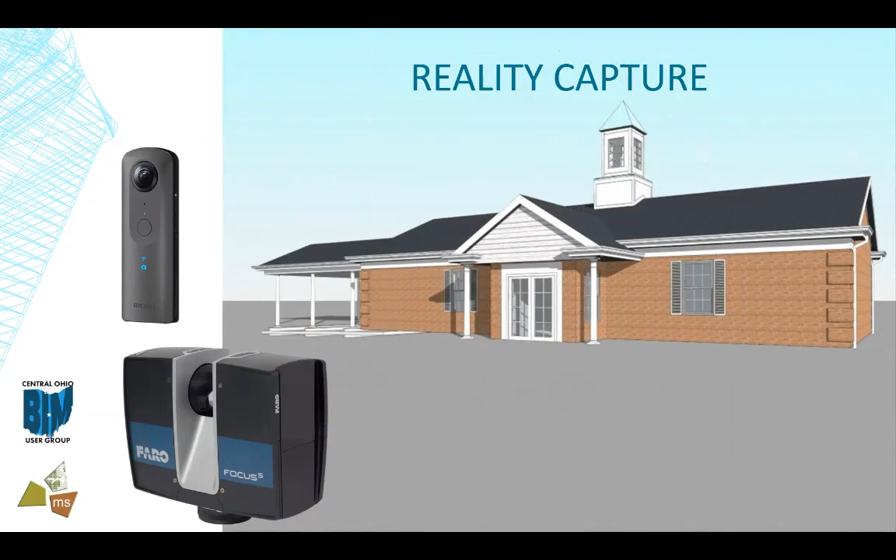So a couple of the ways we've been using this technology - one of the heavy components has been reality capture. We own a couple different means of doing this: we own a 360 camera, point and shoot, real easy, real simple. We own a couple 3D laser scanners, so we started collecting all that data. We figured there's got to be a way to view all this 3D data, so we spent some time focused on that. We got a drone, we fly the drone - same thing, point clouds, got to figure out a way to get all that data in there. Reality capture has been a big proponent for us in re-visualizing all the data we're collecting.

There's a whole bunch of 360 cameras out there. I know we own a Ricoh Theta, I don't remember the exact version, but they have a handful of them. They're very nice, real easy, point and shoot. Just pop it up in the air, and the image you see in the background here was taken from the camera itself.

The images can be viewed and posted on a website. I know their software lets you upload it, they have a cloud platform you can host things in if that's easy for you. It's real quick, real easy.

Those images can also be processed in a whole bunch of different software to let you view them in headsets, like Google Cardboard. It's easy, it's cheap. I think the cameras range in cost from a couple hundred dollars into maybe the $1,000 range, so they're at varying price points per quality too.

3D scanning. Is everybody here familiar with 3D scanning? A lot of good nods. Okay, I won't spend too much time on that since you already know what it is, which is good.

We do a lot of 3D scanning. We've been scanning for at least 7 years that I know about, so we have years worth of data that we reuse all the time. We want to get clients more familiar with their own data, so VR was a natural workflow for us to let people experience their spaces and their point clouds again in VR.

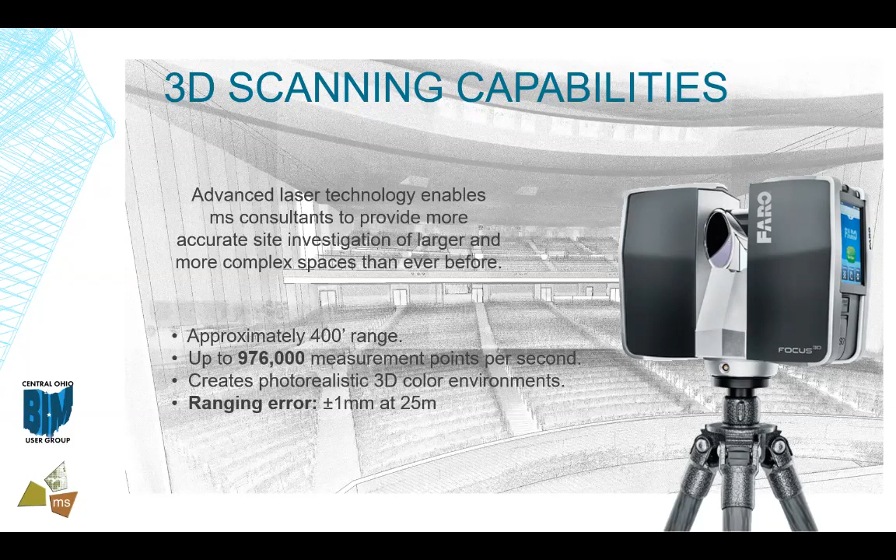These are the ones we ultimately spent the most time on and focused our workflows around. So we use Iris VR. They make 2 products, Prospect, which is their VR platform, and Scope, a mobile platform which runs on Android and iOS devices. It will allow you to upload 360 panoramas to view in Google Cardboard or on a mobile phone from anywhere. It's a nice, simplistic platform you can take with you anywhere. The Prospect application is one of the programs we'll jump into in a little bit.

Enscape is a rendering application that runs in Revit, SketchUp, and I believe Rhino as well. It's a very quick, real-time rendering application that produces really high-end results, and as soon as we saw it we said, yep, we're gonna keep doing that.

That one's good. The Autodesk 360 platform, like I said in the beginning, is one of the places we started. It's cloud-based, so you can upload Revit models, do static renderings, 360 panoramas, and output to Google Cardboard.

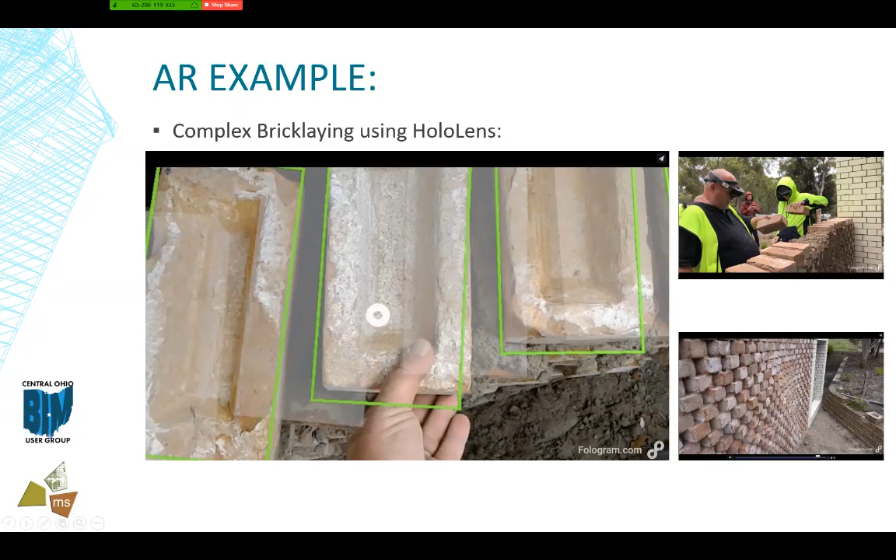Then Hyperform—we saw a video of this where it's more of a VR desktop and video conferencing type of application. The person seated behind the camera essentially has a wall of models and notes and calendar items, and he receives an invite from someone standing in front of him for a video conference to talk about this model. He places it virtually onto the desktop.

They add some trees live, and it populates with the trees. Then he actually creates it as a kind of virtual environment, and it populates all the buildings in the background—a really neat demonstration of that, and of people thinking about where this technology can go next as it continues to advance.

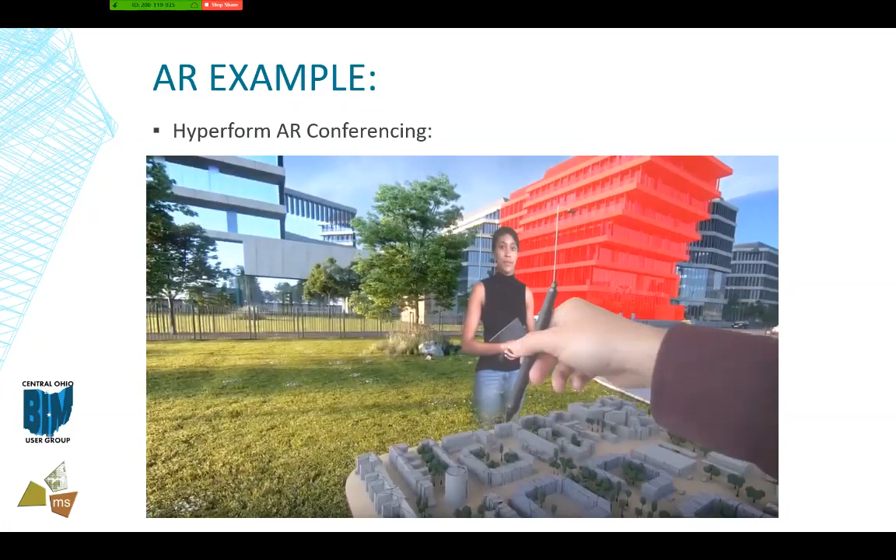That's pretty much the PowerPoint portion of our presentation. Does anybody have any questions?

Okay, let's get to some fun stuff.

We'll start by taking a look at our point clouds. We use the Scene platform. This was a water treatment plant that was scanned a while back—I think it was about 18 scans.

So we're taking a look now at our VR platform with regards to the point clouds. We're going to take a look at Scene and visualize the data that was captured through 18 point cloud scans.

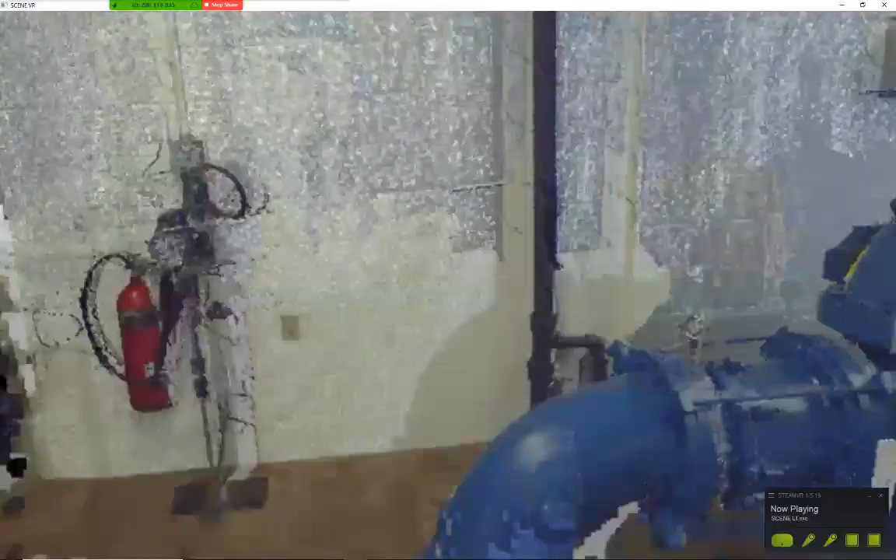So this is a laser scan of a Morse Road pump station for City of Columbus. They scanned the existing conditions, replaced some pumps, and added some new piping. But the M in building information modeling stands for modeling, so we need to create the existing conditions before we can design the proposed conditions.

This allows us to capture very quickly literally millions of points of information, all with an X, Y, and Z coordinate. In the software, we can measure between each of the points, we can walk around. It's both digital information as far as those X, Y, Z points, but also visual. Instead of pictures, it's basically a living environment that you can occupy and examine. So it's not static.

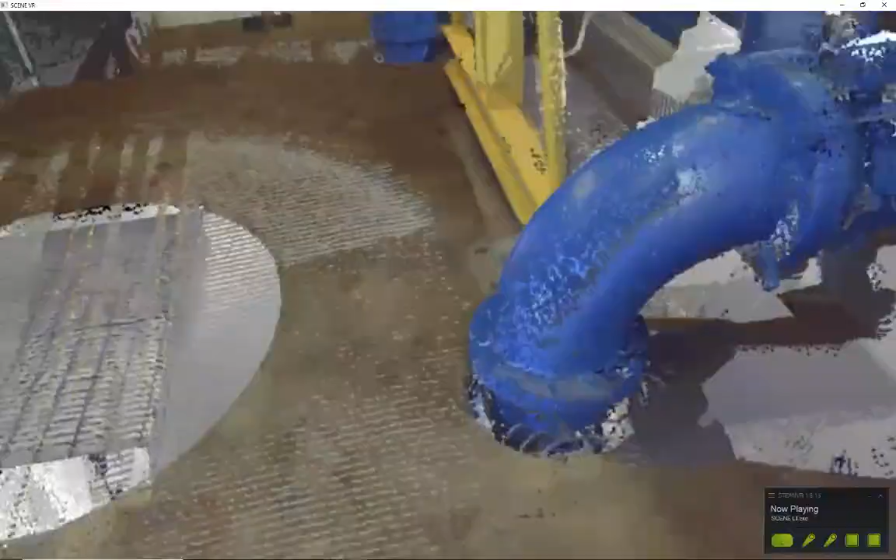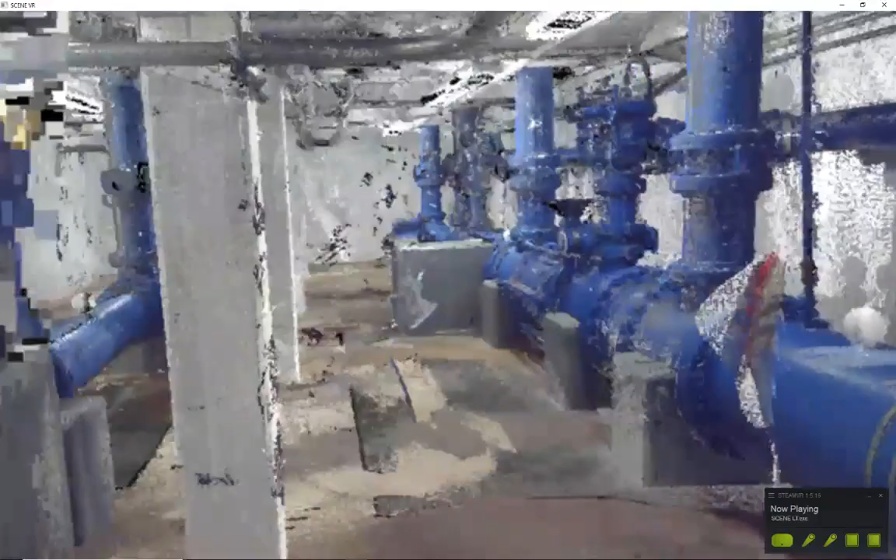I think they said this one was somewhere in the neighborhood of about 20 scans. Typically you can do roughly 400 square feet per scan, but that varies depending on the complexity.

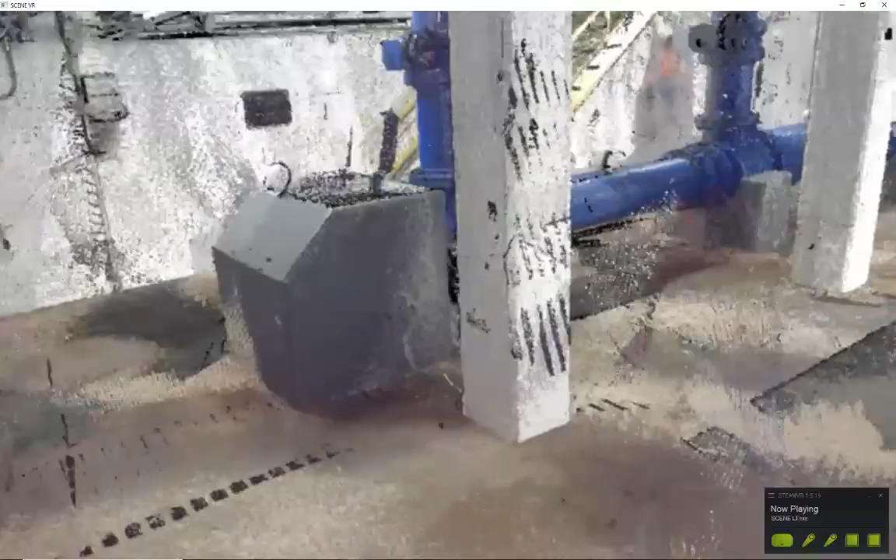If you look at any one spot, there might be kind of a white area behind it. The laser scans are line of sight, so anything obstructed, the laser points can't get behind, and that's basically blank information, almost like a shadow. So if we needed information that was missing from one scan, we would move the scanner to a new location and get the items from that side.

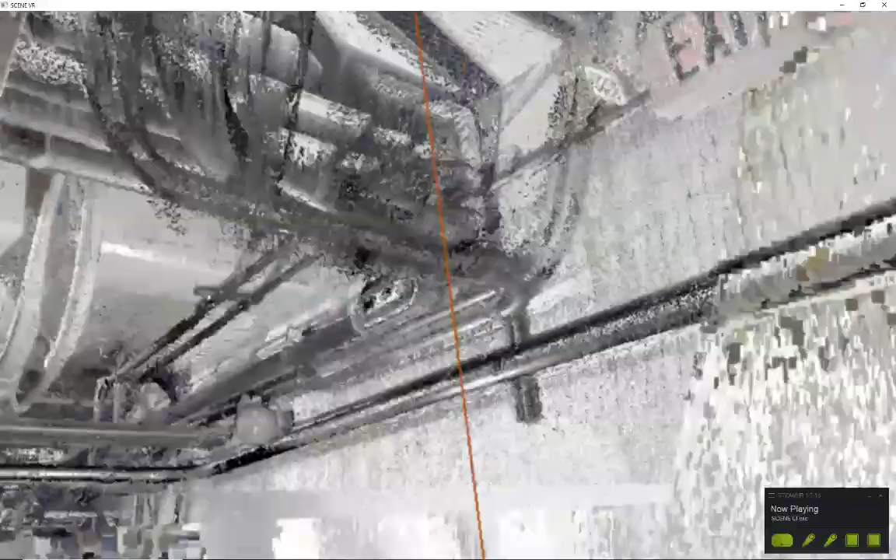You may be able to see basically 6-inch spherical targets, which are just plastic lamp globes we got at Home Depot or Lowe's. There are also paper targets with little black and white squares, 4 squares, that are easier to tape up and transport through an airport as we go from place to place, a little bit more portable. When the software stitches everything together, it's triangulating between all those scan locations or targets, and it becomes something very accurate.

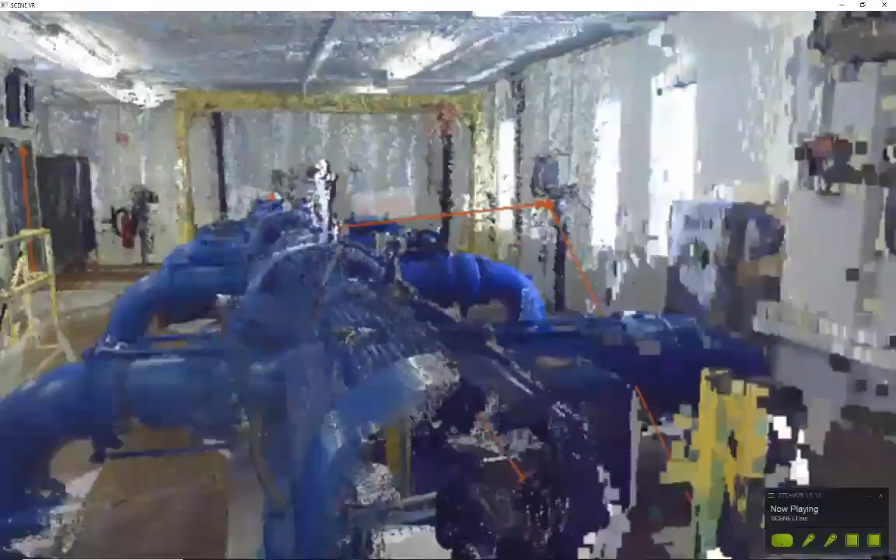This does almost 1 million scans per second, 1 million points per second. Generally, the scans take anywhere from 3 to 6 minutes depending if you're black and white or color. In black and white, it will operate in total darkness, so if you had a ceiling area you had access to but couldn't illuminate everything, it would capture that information above the ceiling.

And now what you have essentially is a live rendered view of that, so this is all on the fly. It's a live link to the model, so I can go back into Revit, change a material, add content, move something, and it will reprocess it and render it immediately. There's no lag, it's back and forth. So this is essentially a live rendered view.

What's nice about Enscape compared to Lumion, they're fairly equivalent rendering wise, but what we found is Lumion has much better strengths, particularly for the exterior and site tools, vegetation. It's got a more complete library, although Enscape is working on that. But interior wise, it doesn't recognize lights from Revit, so you have to either use proxies or manually place the lights similar to Photoshop where you would add lights there. So it's not the fastest process.

The question was how families are grouped in Enscape, and essentially it's whatever you group them in and however you organize them in Revit. So the Revit families, in this case, a lot of the extra content would never be brought into the construction documents because the building department doesn't care about a piece of furniture or a finish. So basically we split the model off and added the extra content into that only. It's not part of the regular set, but they're families we could add into other projects anytime we wanted. However you set it up in Revit is however it's represented in Enscape.

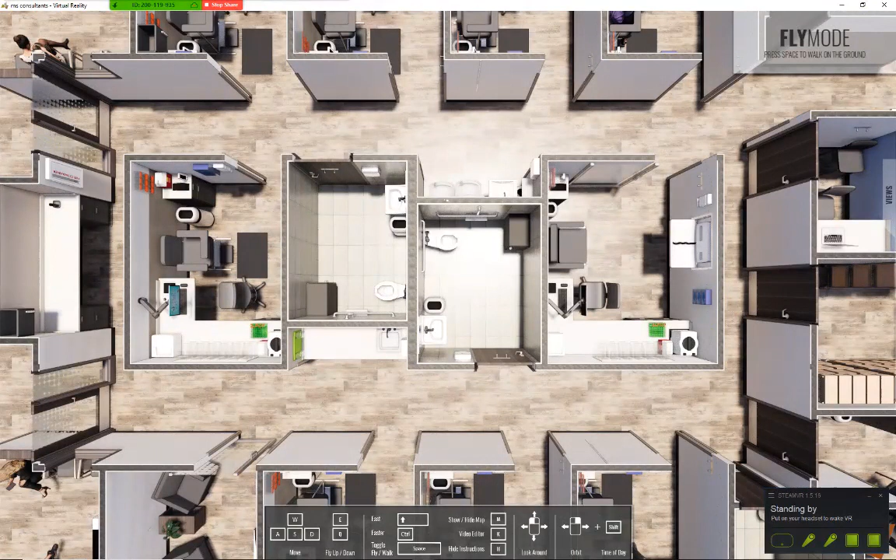So here you can see that it's basically fully rendered. There's a cut plane in the view settings from Revit that basically tells it to cut everything and hide everything above that cut plane. So you can start to see an overall picture of the space with the finishes and decals. Let me go back and switch it back to the other view.

What was stopping it before, I was trying to force it into a forced two-point perspective, which doesn't work in the bird's eye. You just basically have a single vanishing point.

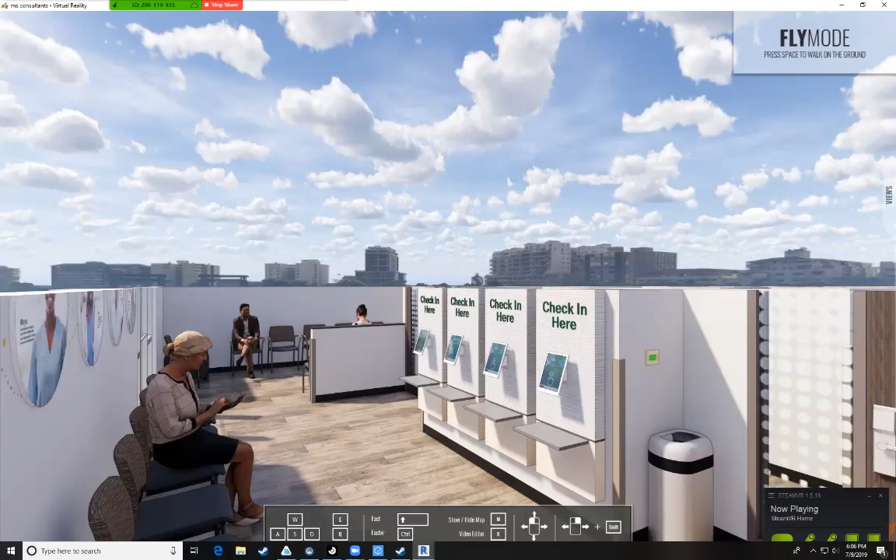You'll see I have like a waiting room alternate. Basically, they wanted a carpet option as well. And let's see, we added some people after the views were set up, so they might not be registered within a certain view.

What we were trying to do was, Enscape has about 50 people or so in different poses. We wanted to start populating that. We didn't do that with the official version for the client, but we just wanted to add some visual interest. Once you actually put the headset on and start to experience the scale, it really is a noticeable difference between what you see in 2D projected on the wall versus what you see with the goggles. The spaces are much more intimate in the fully immersive environment.

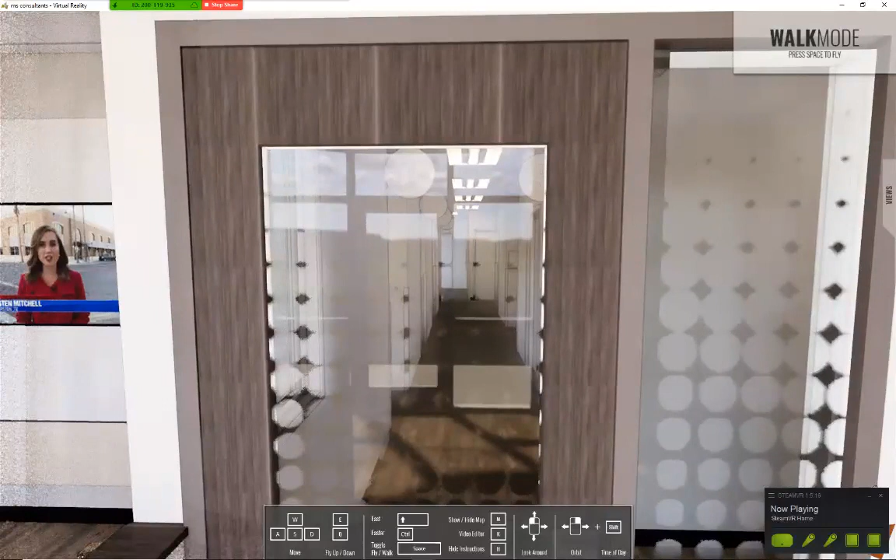So the question for the recording is whether it's more valuable to have an interactive meeting with the client where you can change things on the fly, render it on the fly, and not have to wait for results to be presented and sent, by which point you're past your meeting. So yes, there is a very strong value.

We've had meetings with this client where we showed it to them. It's very helpful. These are not people that are skilled technically on the architecture, engineering, or design side. So for them to be able to understand better the things we're showing them and communicate that with staff through the use of these printouts that they can look at, it's really done a good job of building up the excitement for them to roll stuff out.

Their preferred method was PowerPoint slides. The person was very familiar with PowerPoint, so he'd just put these presentations together with static images, and the quality was good for their part, but lacking in terms of communicating everything they needed to. So we stepped the game up for them, and they're very excited by that.

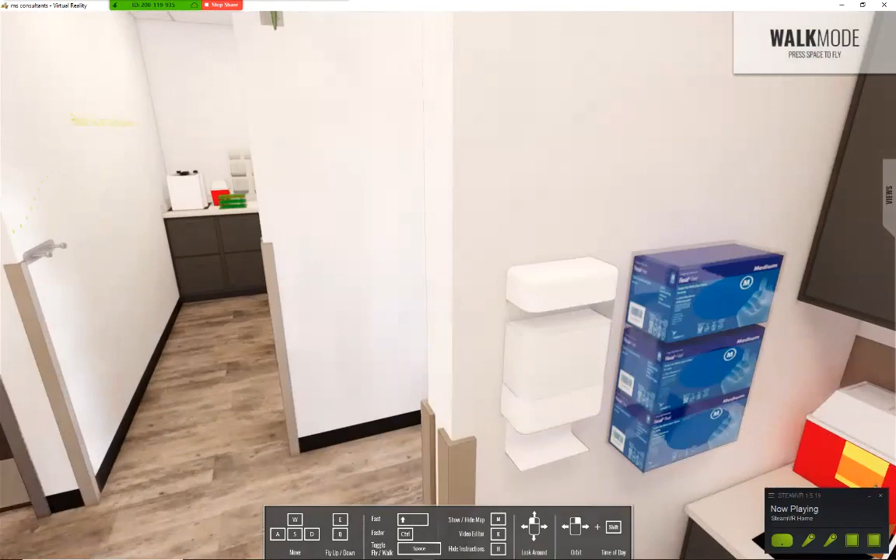We actually had a client come in, and they were very interested in seeing what a view window through an electrical room into their treatment plant looked like. On paper, there's really no way to get a perspective of what you're actually going to get and if that window's in the right spot. They were very adamant that the window was important, which it is.

So coming in and putting the headset on and standing in front of that window, in 10 seconds they're like, good to go, after we moved it a foot. There's no real way to see that until you see it at one-to-one scale. And the one-to-one scale has been incredibly powerful for us.

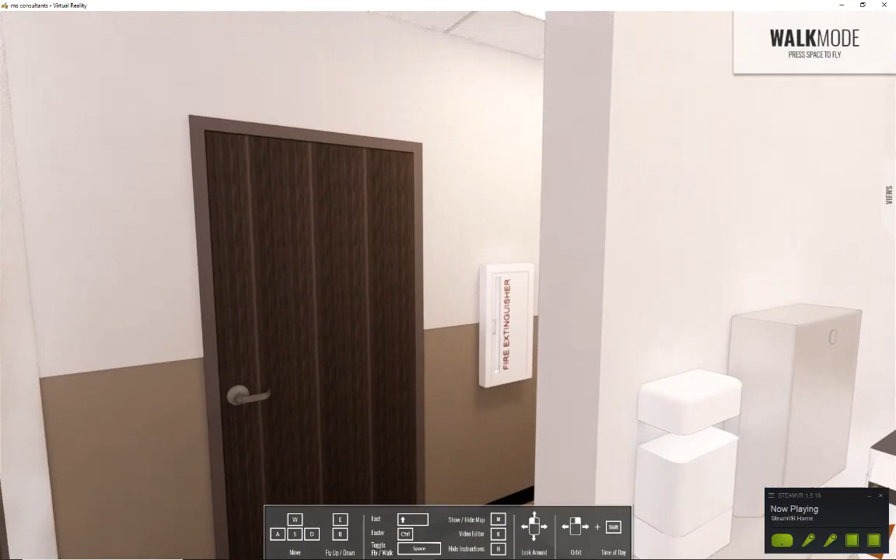With the client for the facility you see here, they actually came in and we had them sit physically in a chair, and then they positioned themselves at one of the blood draw chairs so they could get the perspective from both the client, then as a tech, and then as somebody else entering the space, to get a feel for how these spaces are going to operate.

And for them, that was super impactful. They were really excited to be able to have that experience, because otherwise you have to wait till it's built. So now they're way ahead of it.

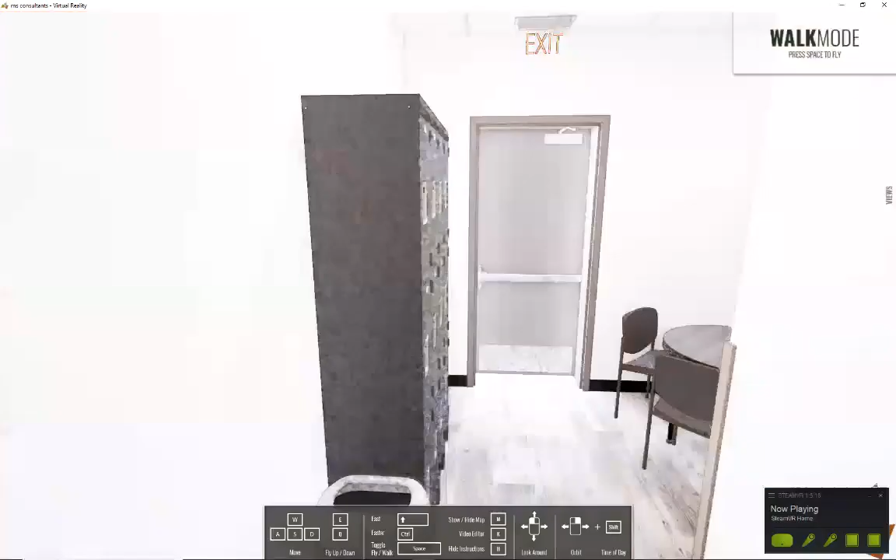And you can change things like materials on the fly. So if they're not comfortable with the floor or wall paint or things like that, you can change those on the fly, and in a couple of minutes get your palette lined up. You would change it in Revit. So when I talked about moving the window 1 foot, we moved the window 1 foot and all the CDs were done, and they were visualizing it in VR all at the same time.

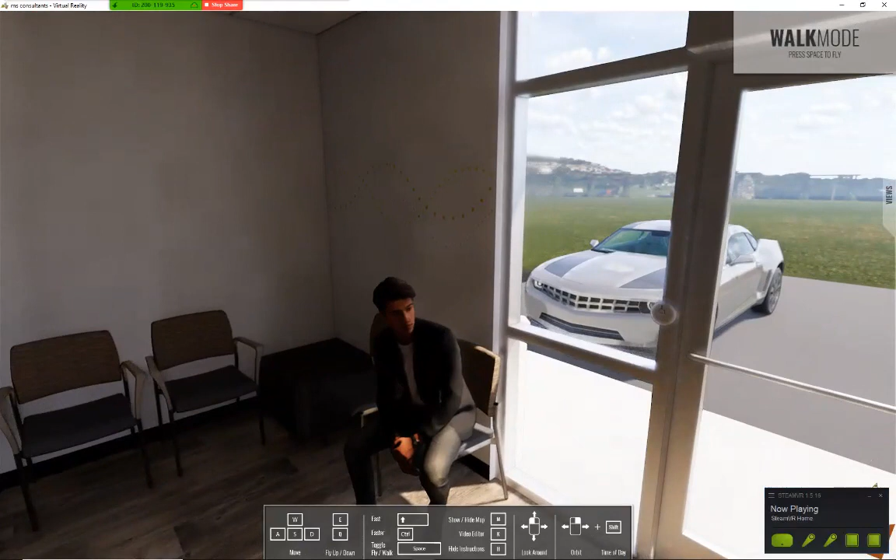Yes, what we had hoped would work would be to create views. As you navigate through, it obviously works better on 2 screens, but we're trying to capture everything on one. So there's overlap there. So the question was, how do you track changes between versions when you make edits?

It's a difficulty and a challenge. Even to the point of when you get a view that you like in Enscape, there's a button to create a view from that. But in the Revit version of it, it doesn't quite look the same, and so you have to adjust it again. And then it's very difficult, I've found, to get the same exact view from iteration to iteration.

So ideally what you would do is create renderings in a dated folder and then make the changes, and you'd have to do new renderings and try to match it as best as possible. I haven't yet been able to replicate an exact view because the difference between the Revit version and the Enscape version were slightly different.

So it creates them from Enscape, but saves them into Revit, and then Revit changes them slightly. So maybe it's a matter of setting up the window properly so that it matches more of your display window in Enscape, if that makes sense. I haven't examined it too closely yet.

With Iris VR, you gain a tremendous amount of tools, which gains functionality and lets us do things with VR that we weren't doing before, as opposed to just viewing a space, which is really cool, but we want to be able to use this stuff. So with Iris VR, we're able to do room scale models. We can scale them up and down. I'll put the headset on and demonstrate some of these things.

These tools let us have clients come in and do real-time markups, make notes, all in the VR space, take measurements, do sun and shadow studies. Probably missing some, but when I put the headset on, I'll try and walk through them all. The caveat is it's at a slightly lower visual quality, so it sacrifices the visual aspect in favor of a lot of better tool sets.

The same way that Revit is kind of a decathlete - there are faster sprinters and farther javelin throwers, but Revit does many things very well - Iris VR has certain advantages compared to Enscape, and Enscape has its own advantages and disadvantages. So there are trade-offs. There's not any one perfect solution yet.

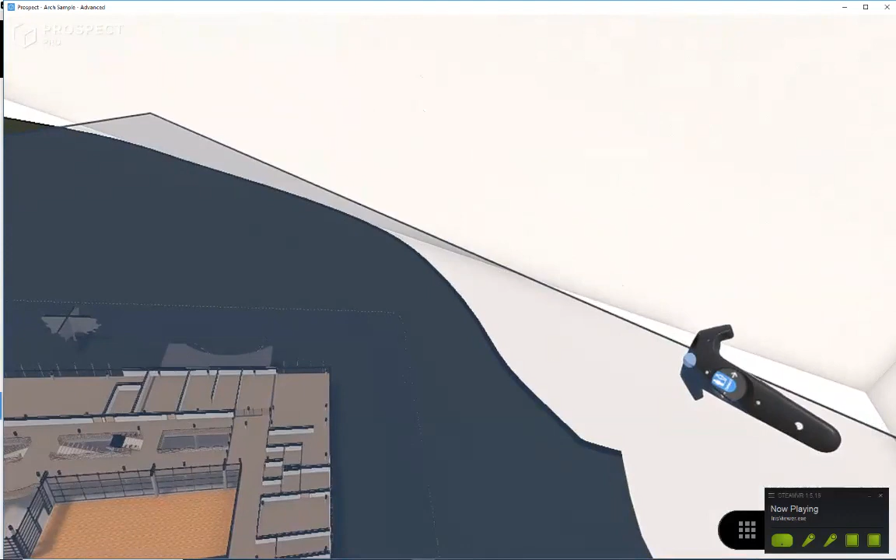They're starting to play well with each other better, and these developments are something we've been monitoring. I know Iris VR mentioned that they were going to be adding live lights from Revit in their workflow at a future release. And there, Dom is showing a live section.

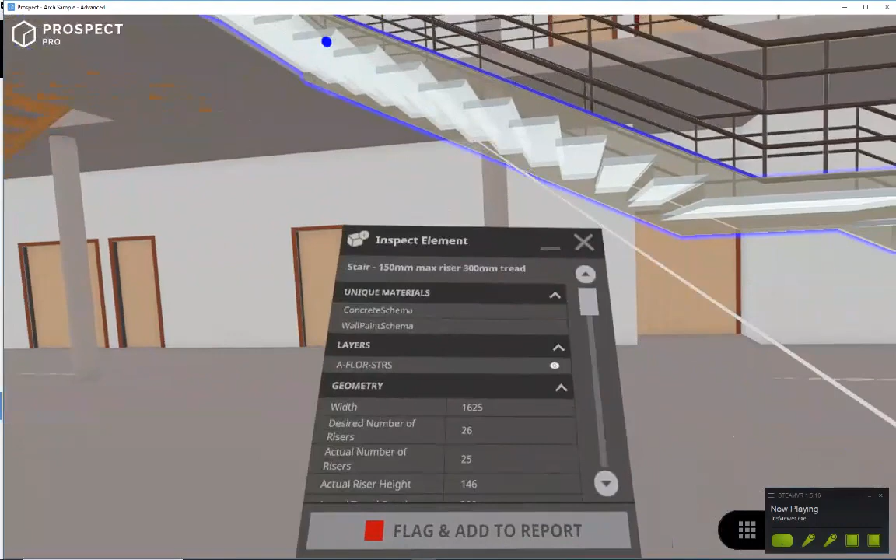Inspect element - you gather all the BIM data. It's coming directly out of Revit, translating all of that information along with it. Select any object, gather its properties directly out of the Revit model.

There's a very feature-rich set of markup tools. We can do callouts, calling out across the space. We can do brush with a projected surface, so I can go graffiti on the wall. Or my personal favorite is the handheld brush, which lets you mark up in 3D space.

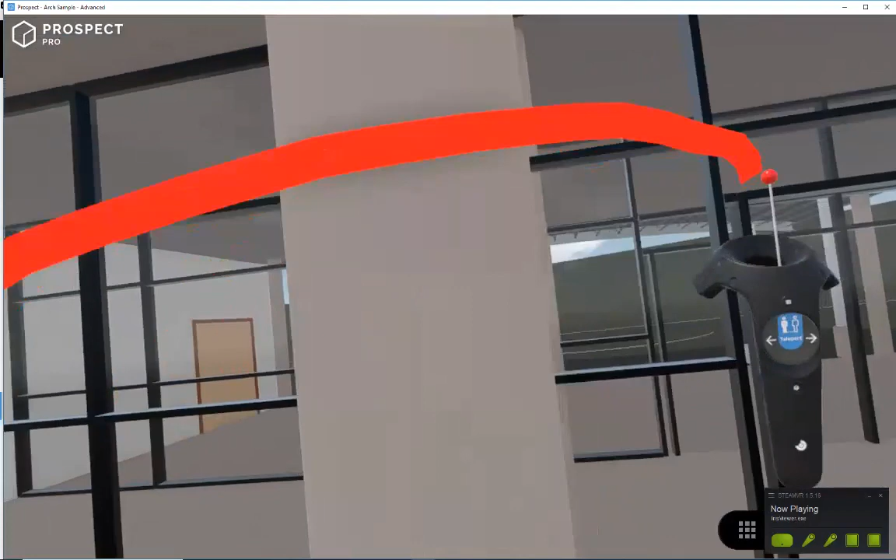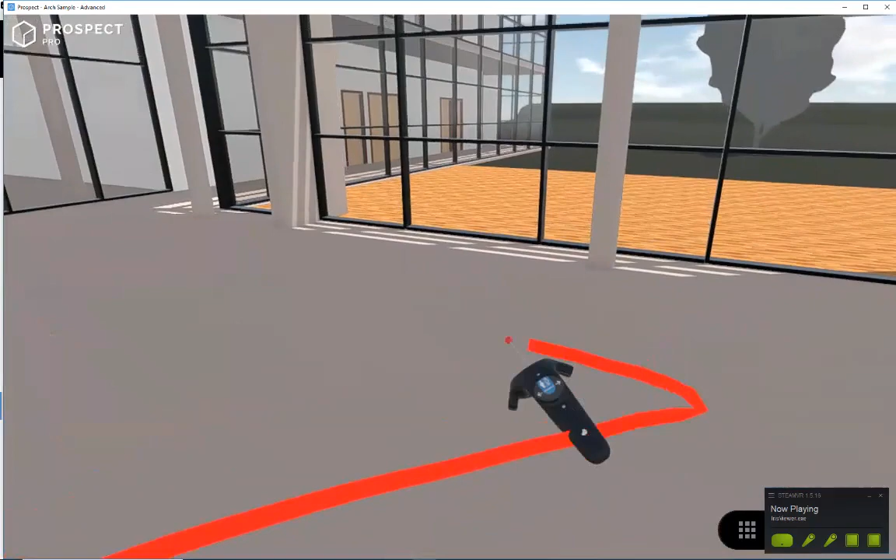So I know you asked the question about capturing all of this content that is done in VR. One thing this program does that's really nice is allow you to take screenshots while you're in the space. Screen grab that, and you can see adding the images and comments to a report to be exported as a PDF for use outside of the VR.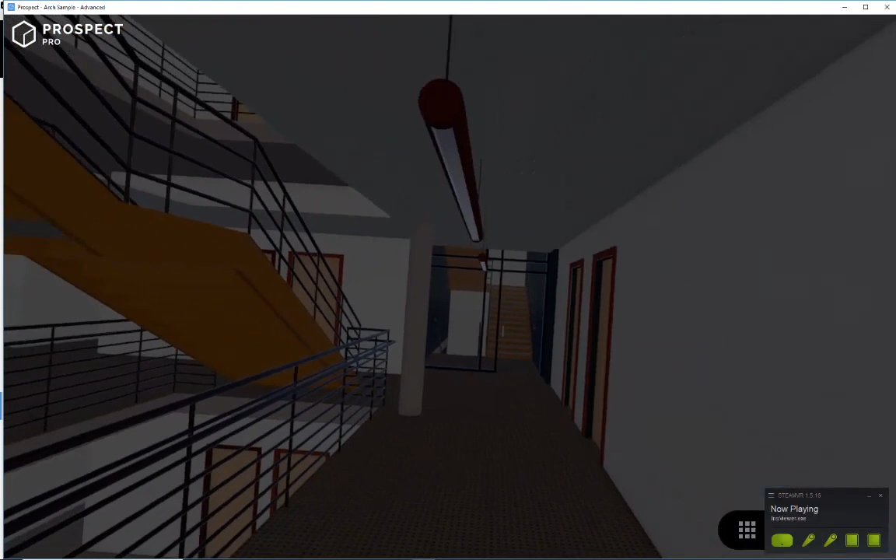Like I said, Iris VR doesn't recognize the lights directly from Revit, but it does do environments, and yes, it does work with linked models. It does not recognize the lights directly, nor does it have real lighting calculation—it's just ambient light essentially.

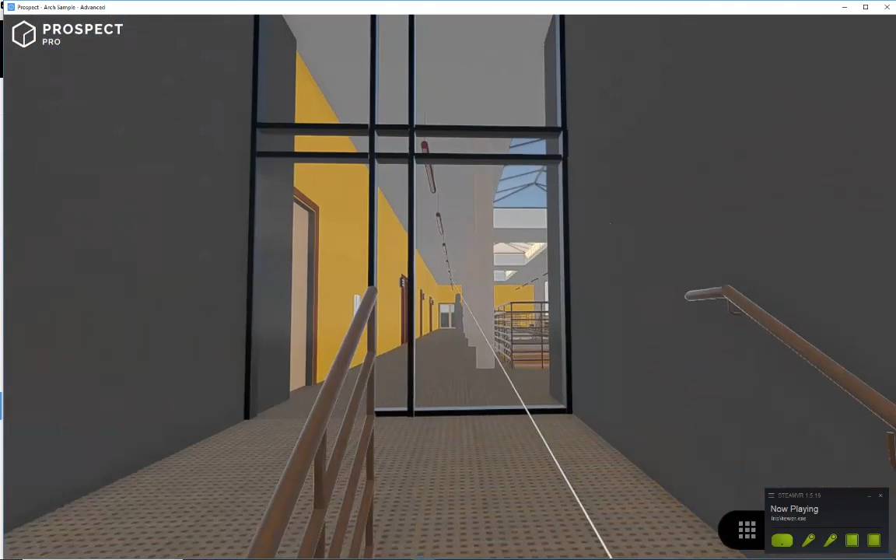One of the things Dom mentioned earlier is basically focus tracking. Areas for optimization occur where your eye doesn't have to be at as high a resolution, so it can save not having to process everything outside of your area of focus. I don't think that's in this version yet, but other software and gaming engines are developing those technologies to optimize it even more.

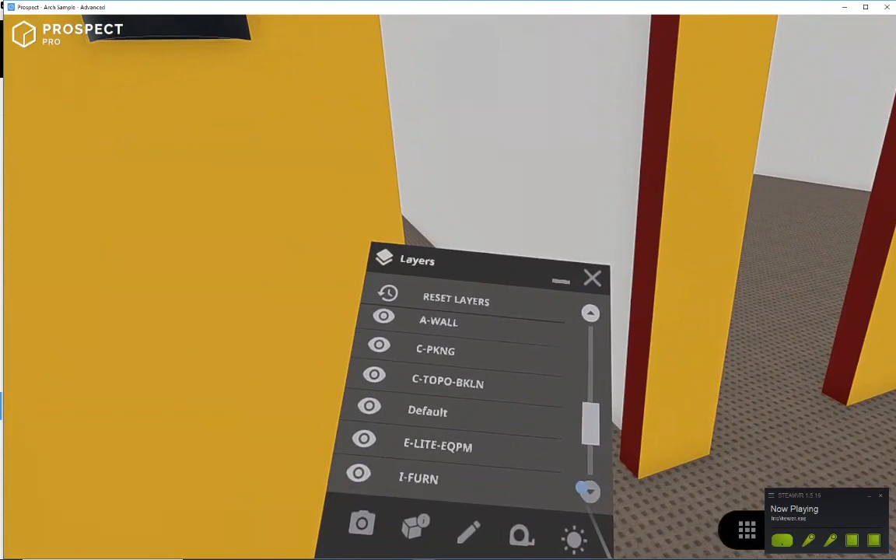Here he's turning layers on and off. If you wanted to do this as more of a visual guide, you could isolate mechanical ductwork, piping, or conduits above the ceiling or in concealed areas. It's a faster, easier way to navigate around instead of running a clash detection report out of Navisworks as a possibility.

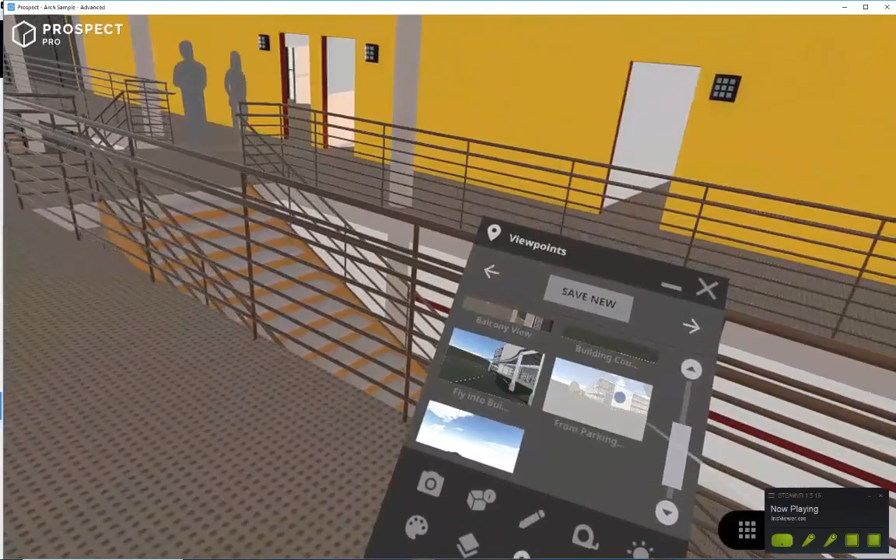Yes, it's a paid application. Enscape is pretty cheap, actually—I think you can rent a monthly license for about $45. If you only needed it for one project, that'd be great. If you wanted it for a year, I think it's $450 for a standalone version. A network version adds a little over a couple hundred dollars to that, so around $600 something.

But you can have meeting spaces. You just go to a meeting, create it, two people join, three people—I think it goes up to a couple more. You can see each other as little avatars in the space. You kind of have these collaborative sessions in VR, which is really cool.

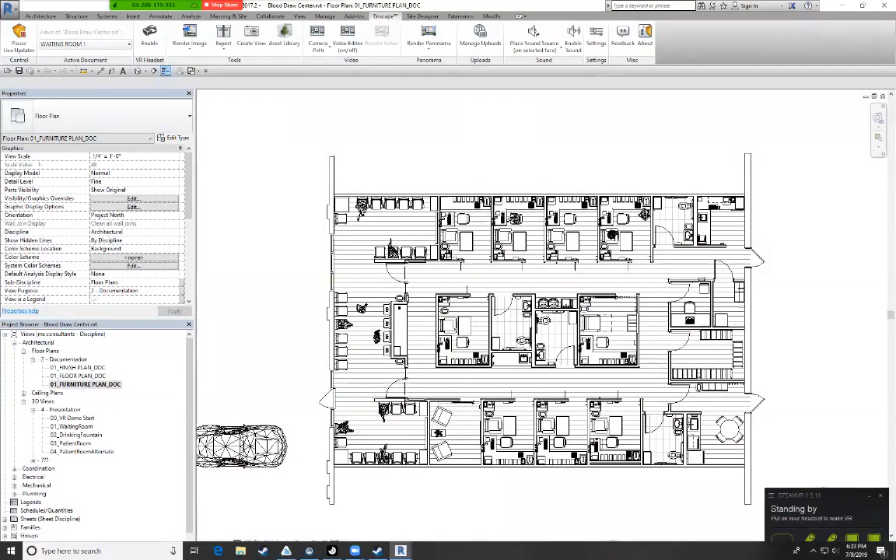Just like that, only different.

If you're in it for a while, you start to notice more that you're nauseous.

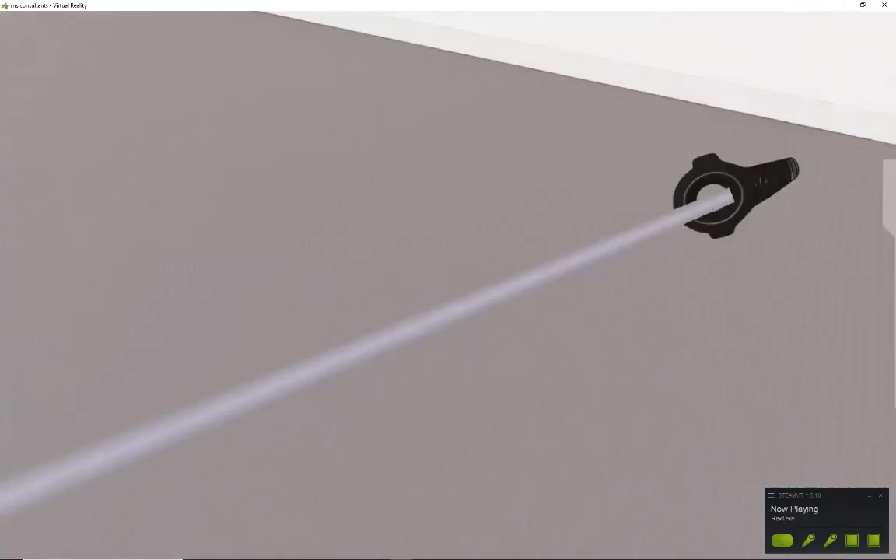Some applications, Google Earth has a VR application. It moves rather quickly if you're not careful, and without much warning you can jump up to 30,000 feet in this big jump. But it is really cool—it's getting very helpful with photo meshes.

So with your point of view, you pull the trigger partially and you're going to see it merge. Pull it all the way, you feel it click, and you actually jump to that location—teleporting like that through windows to others. Anything that goes orange you can teleport to; if it goes red, it just means you can't teleport to that spot.

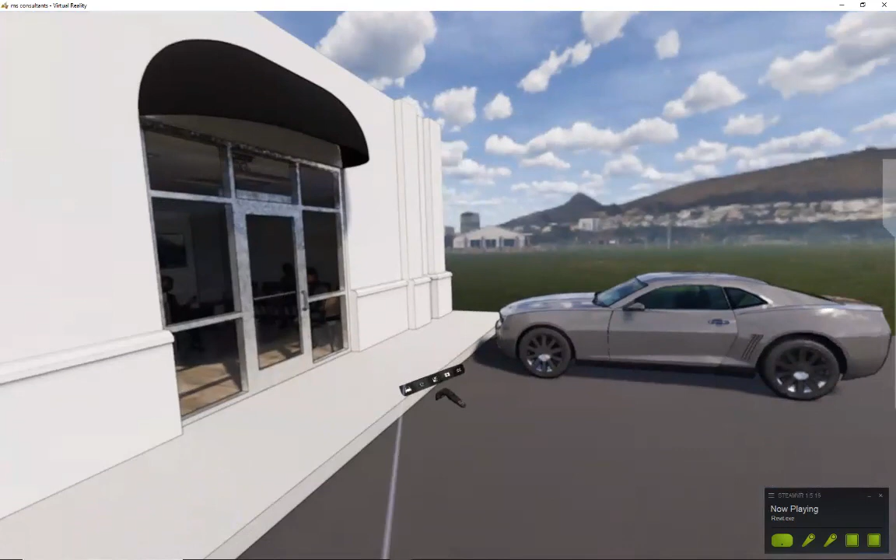You have all of the space in the basement to physically walk around in. You're not limited to just standing still. You're probably going to see that blue grid.

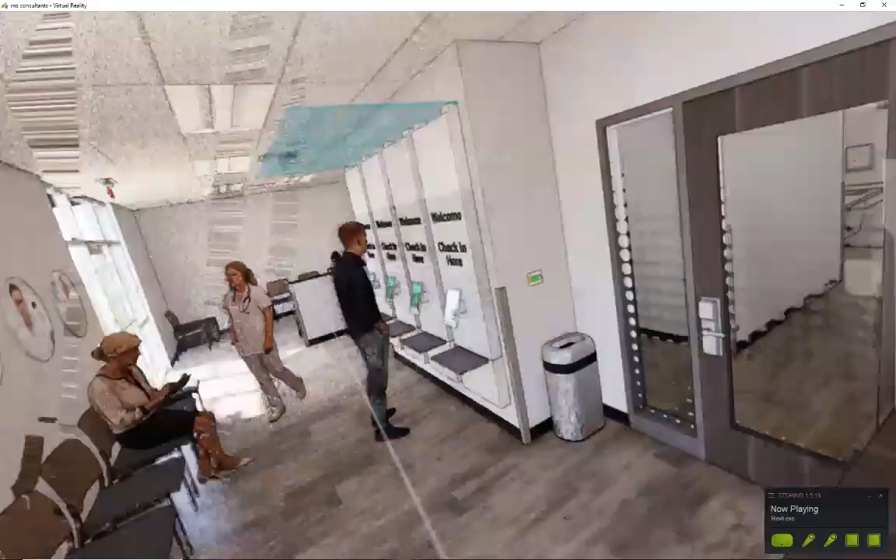You mentioned earlier about having a different point of view, like sitting at a demonstration. Are the goggles picking up your height automatically? They are—the headset and handsets are actually calibrated to the floor, so for vertical offset from the floor it finds where the camera height is.

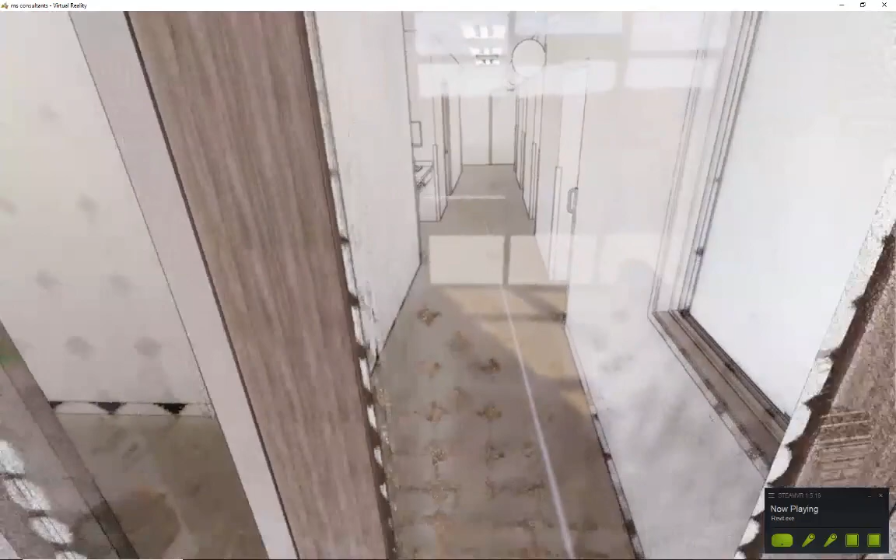That's true for the Vive or an Oculus, something with external sensors. A phone-based one, you're going to kind of—and Windows Mixed Reality, in my experience, is also shaky. Yes, that downgrade in cost and quality is one of the things you experience. I find the handset tracking of Windows is a little less accurate.

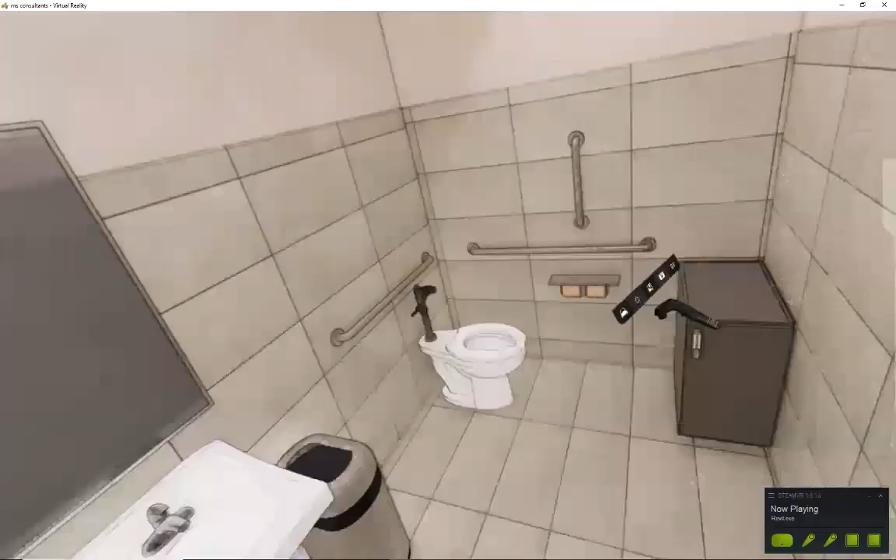I guess if you're calling out, you're smacking your head on something. Yeah, so I don't know if I'm that tall—the calibration for the headset you're watching yourself with, from about 5 months ago, may just be off a little bit.

Yeah, it kind of drifts a little bit every time it gets unplugged and plugged back in—all the time, so it'll drift a little bit.

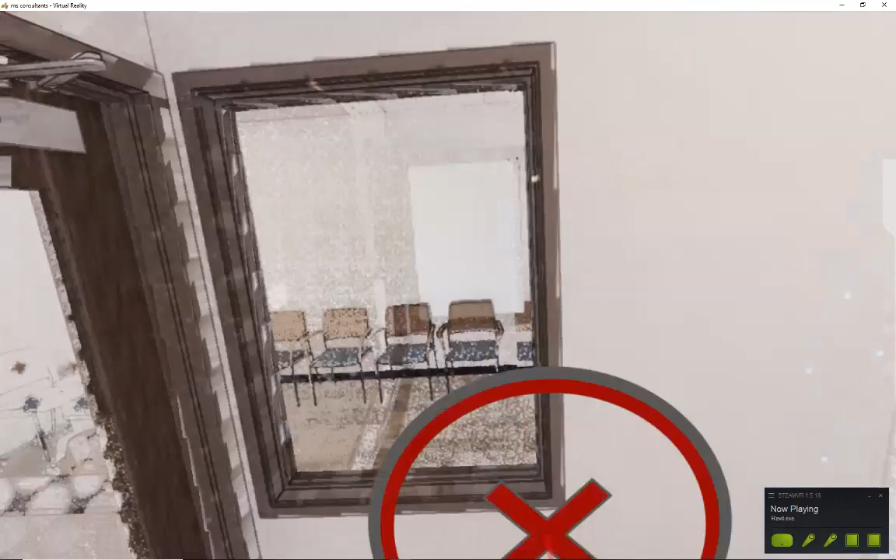Basically, there's a fly mode and a walk mode—walk mode looks a little different. I find that Enscape seems to have your head height get off a little bit easier; Iris is usually pretty spot on, or feels a lot more accurate.

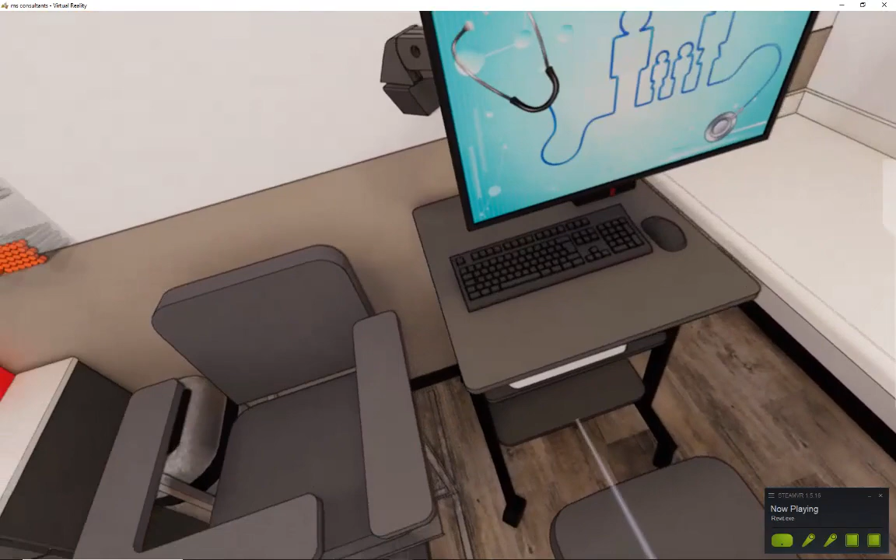You also see those red markers, yeah.

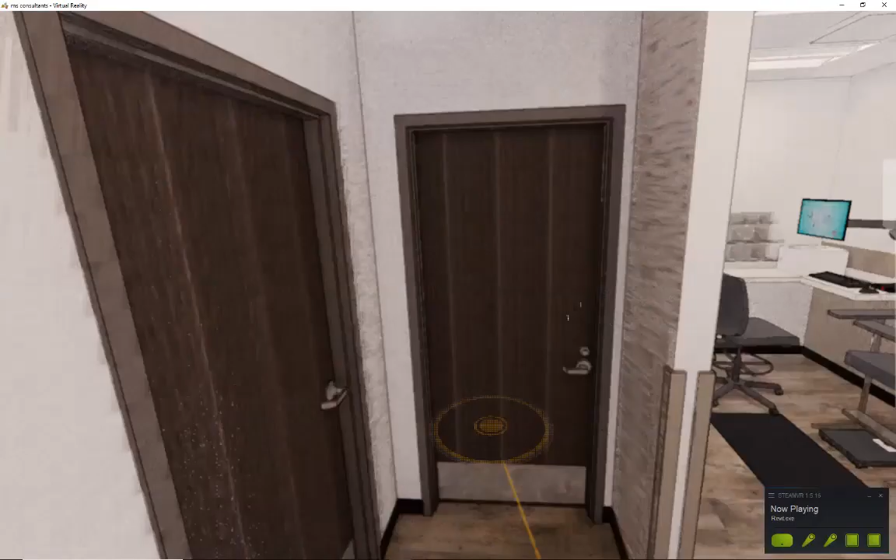So on the screen, you create additional views, somebody would take a point of view. For that, you take the goggles. So the question was if we did anything different to create a view for somebody that might be in a wheelchair. Yes, we can do that. Does anybody else want to try?

Any thoughts on the difference you noticed between 2D versus occupying it virtually? Yeah, I mean, you definitely get a better feel for how you can interact with the space, like if you look out a door, how far you can see down the hall versus just putting a rendering.

We did a presentation this past week with City of Columbus for the water treatment plant, the pump station, and they're very enthused by it. So from a facility standpoint, they're very interested in it. We showed one where we had added an observation window into the actual pumping room itself, where normally they wouldn't have that, and that just gives them the ability to monitor things even more closely. So they were excited by it.

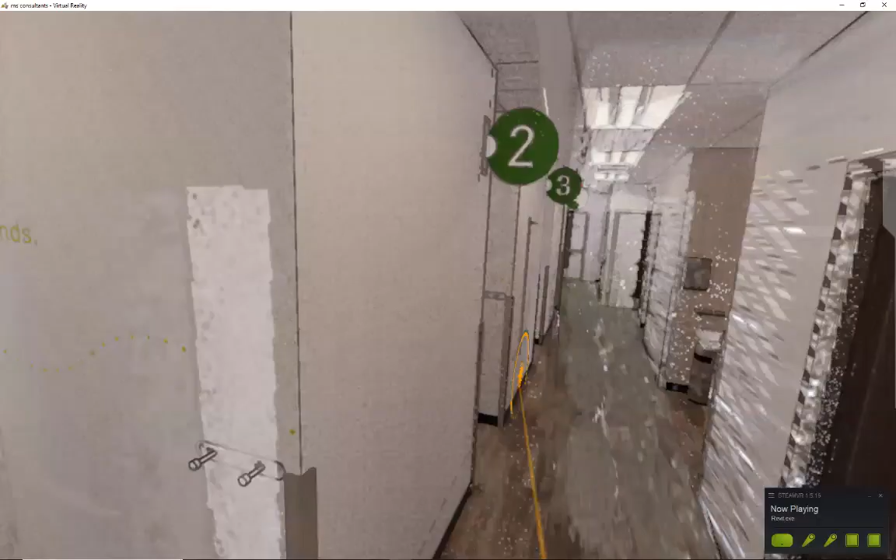Documents rule, yeah. So the point clouds that we gather are very accurate, literally within a millimeter, within probably 75 feet or so. I mean, so it's very accurate. But there are always places that we can't quite reach, or doors that are locked, or ceilings that are hard without access panels. So there are always the risks of undiscovered conditions and things that it doesn't pick up.

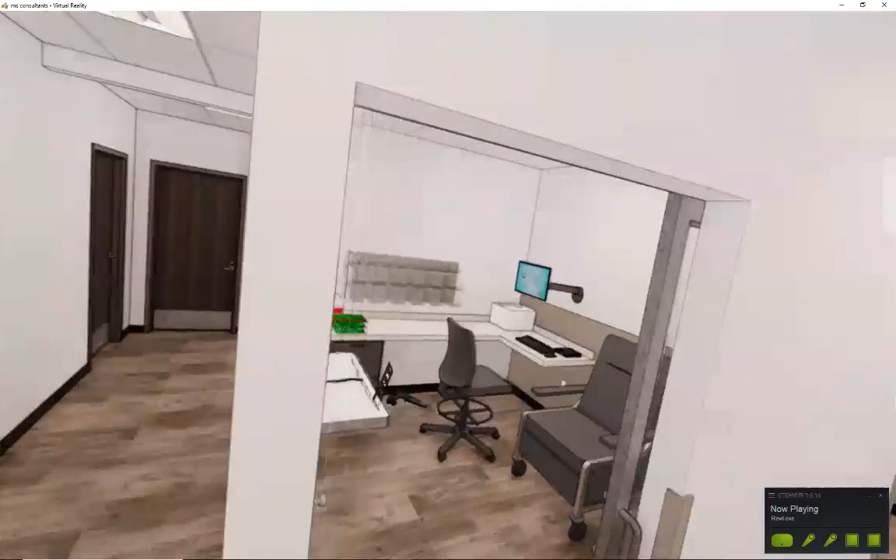We did a survey for another architect of the Grandview High School. So we scanned that, I think it was about almost 400 scans. And then we modeled it basically to a level 200 and then gave them the Revit model for them to actually do all the design work and scope. But because we have it in-house, because we have people with architecture and engineering experience that are actually doing that, as opposed to civil surveyors or surveying companies that are more used to surveying professionally from that aspect of it, that don't have necessarily the architecture or the engineering experience, it's a little bit of a differentiator.

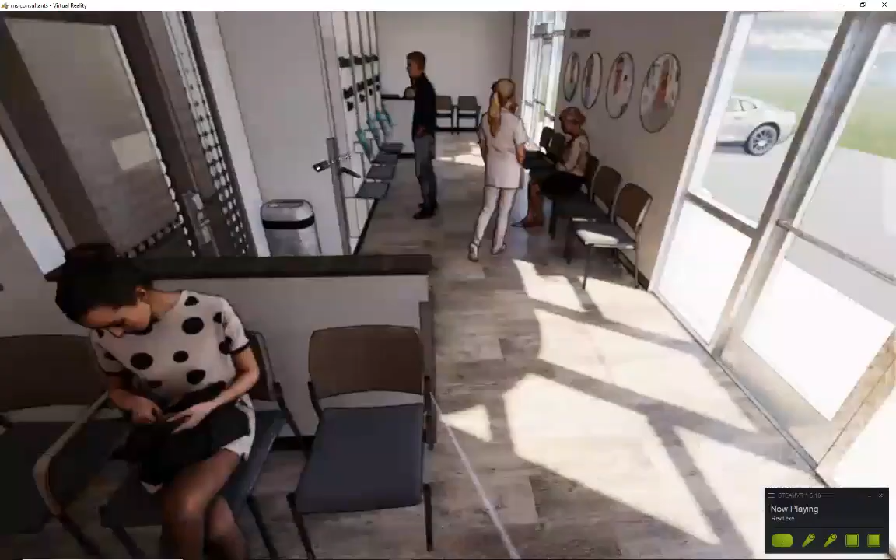The price has come down from 6 figures where the scanners were a few years ago, into the 5 figures and continue to drop. So it's becoming more affordable for firms to start using. They have the BLK360, which is a little bit more portable one from Leica, I believe. We use Faro, and we have different ones for our actual surveying crews that do roads and traffic and stuff, engineering.

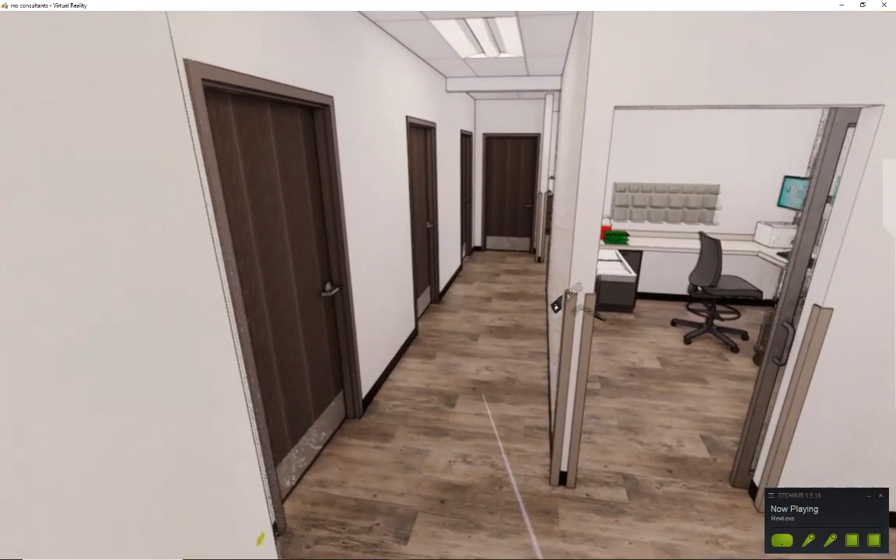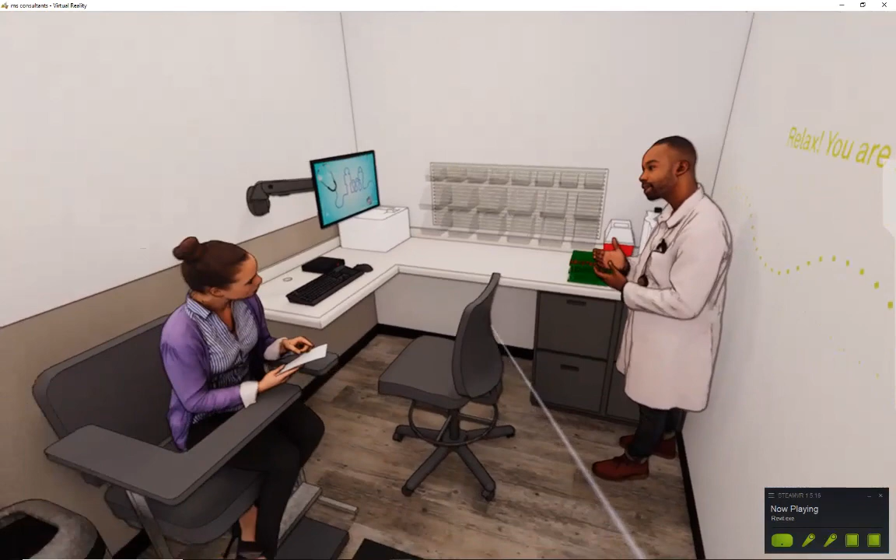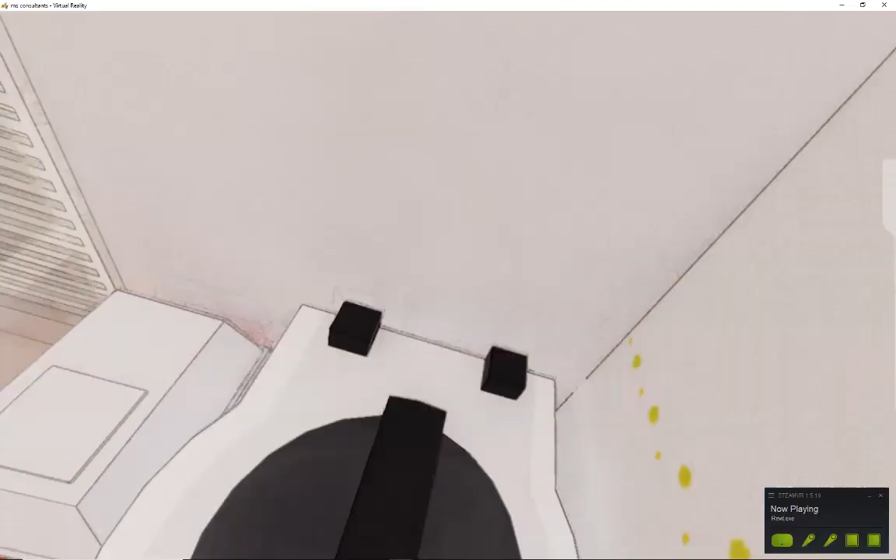So what we're finding is that obviously there's more and more modeled content from vendors that we can add, but you still have to create a lot of your own content or modify something that you might be able to find online someplace. They're fairly simple parts, we weren't ever using them to schedule anything, just to represent them.

It does use Revit's materials and renders them on the fly. Now, Lumion allows you to change materials, but it doesn't communicate those back to Revit.

I learned a lot about decals on this project and applying them. There's some storefront graphics that we can't show because of logos and things, but the way that it shows up, it wouldn't work if you had an outside environment and the light from that was coming through, because it would kind of counteract the decal, until we started to model some of the sidewalks in the parking lot where it had something kind of blocking that. Oh, there it is all of a sudden. So we did a lot of workarounds on decals.

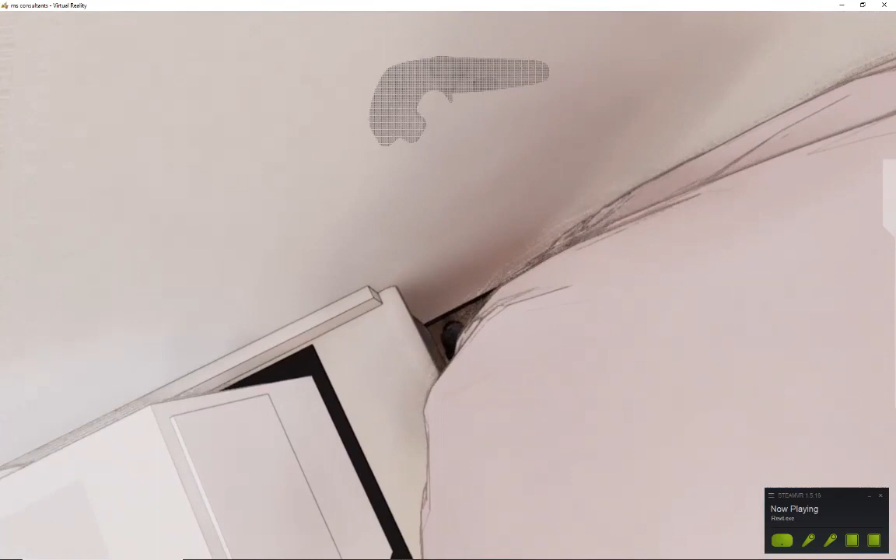We haven't really looked at it. We've heard of it. At Autodesk University last year, there was a lot of information on Unity and Unreal and those two paths and different factions. It's almost like they're starting alternative.